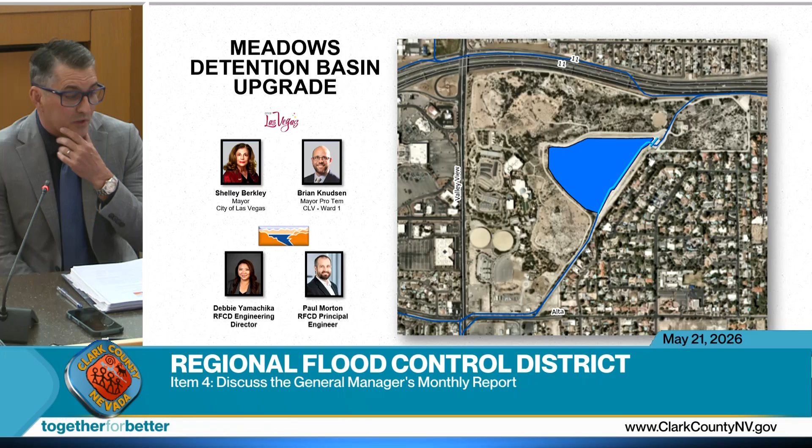And I'd also like to report on a project closeout that we had, and this is in the city of Las Vegas, Ward 1. It's at the Springs Preserve, actually. We have a detention basin at the Springs Preserve. Some analysis and computer modeling showed that detention basin was actually undersized, so we had to have a project to expand that basin. One of the first ideas was to just dig out the entire basin, make it bigger and hold more water. Unfortunately, that wasn't a great solution because that is a cienega, which is basically a wetlands where the detention basin is. It's a habitat for the Springs Preserve. So we needed to come up with a more innovative solution.

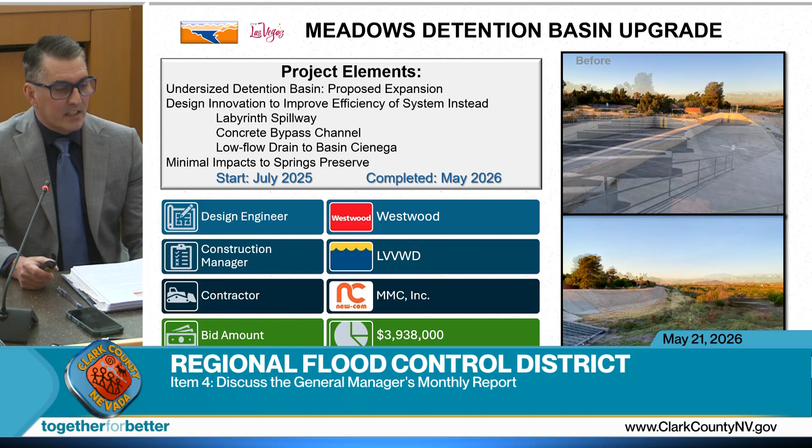So what we did, if you look at the picture on the right there, that's the before picture. We reconstructed the spillway and also added a channel that would flow through the basin so that more water would leave the basin as the storms come. Looking at the picture, you can see how it transitioned. That's what we call a labyrinth spillway, that spillway on the top. It's more efficient than the wall that you can see there. More water can go over the spillway at the same elevation, thus protecting the homes downstream.

Then the bottom picture, that's the channel I was mentioning that carries not the 100-year flow, but something less than that, so the lower flows will pass right through the basin without ever getting into it. Once the water gets above that channel, it'll spill out into the detention basin and hold that water there. To water the cienega in times of very low flows, there's a drain system that allows the water to drain into the cienega to water the wetlands and the habitat during dry times. So great project, very happy to get this one done. The design engineer was Westwood. The construction manager was actually the Las Vegas Valley Water District, who owns and operates the Springs Preserve.

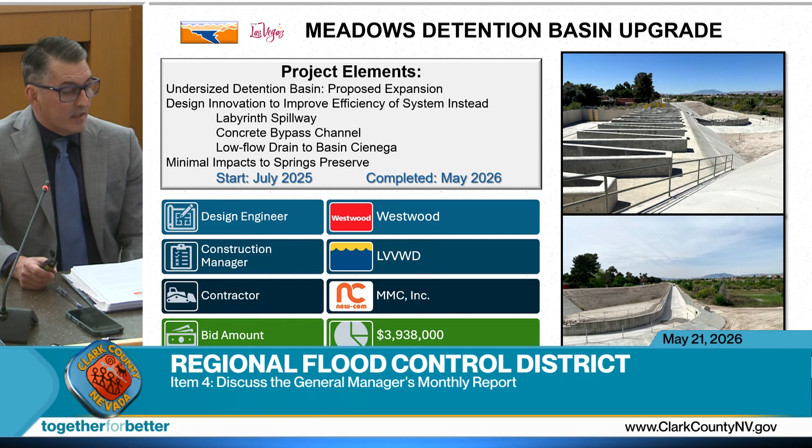Contractor was MMC, New-Com Company, and the bid amount was just under $4 million. Happy to get this project completed. And that concludes my general manager's monthly report. Happy to answer any questions. Thank you, Mr. Trelease. Any comments or questions from the board?

Mr. Vice Chair. Just want to say, now I know what a cienega is. Yes, I didn't know what that was either, so thank you. Thank you for educating us today. You're welcome. Very good. Move on to the next item.

Okay, we'll move on to part 2, the consent agenda. Items 5 through 13 are considered by the Regional Flood Control District to be routine and may be acted upon in one motion if the board so desires. I'll entertain a motion. Motion to approve the consent agenda. All those in favor? Aye. Aye. Any opposed? Motion carries.

Item number 14 is the Flamingo Wash University Center Drive to Palos Verdes Street project. Item A is action to accept the project presentation. We have a presentation presented by WSP for this. Matt Freeman is here.

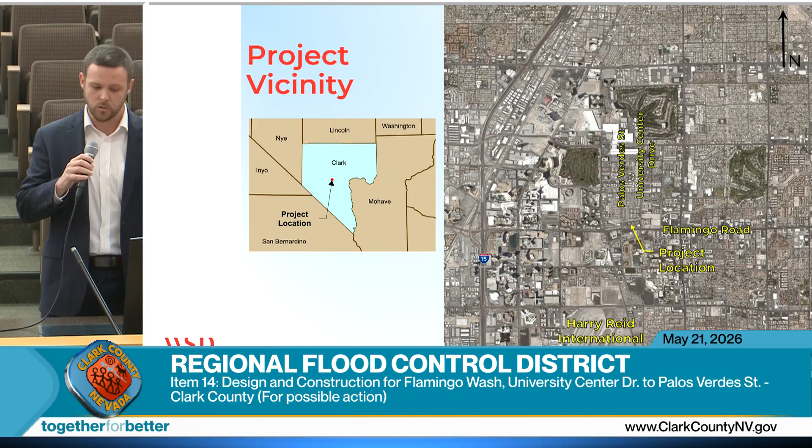Hello. All right. Good morning, everyone. My name is Matthew Freeman. I'm an engineer for WSP. Appreciate you taking the time to listen to our presentation on Phase 2 of the Flamingo Wash improvements. This project is located east of the Las Vegas Strip, just north of Flamingo Road, between Palos Verdes Street and University Center Drive.

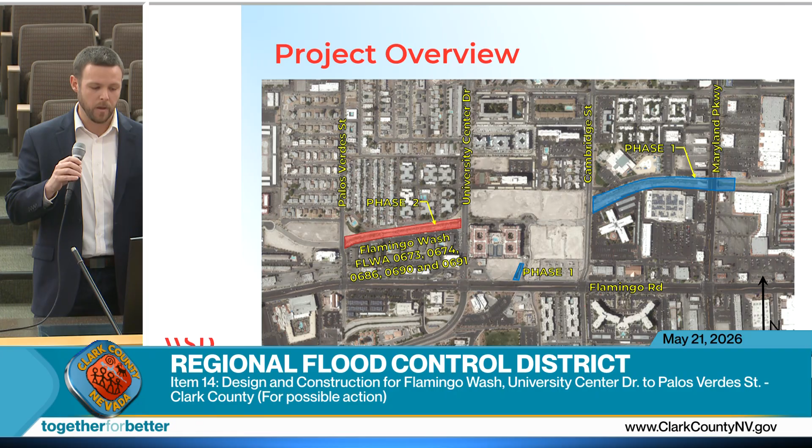On this slide, you can see Phase 1 of the project, which is currently under construction. Some of the improvements that were part of this project were the construction of a rectangular concrete lined channel. We also placed a lid on the open section of the Flamingo Wash, which you can see in that blue sliver towards the middle of the slide. And we also installed some of the expanded metal fence portions in the Phase 2 area.

So I'll walk you through some of the improvements here, starting from left to right. We plan on extending the five 12x8 culverts that are under Palos Verdes Street, which will then transition into three 20x8 culverts before transitioning down to three 8x16 culverts. From there, it'll flow into an open channel section, which will transition down to approximately 650 linear feet of a 30-foot wide rectangular concrete channel before transitioning back into three 10x7 culvert extensions that will flow under University Center Drive.

Other improvements as part of this project are a paved recreation trail along the north side of the channel, which will be funded by RTC. We will also provide colored concrete walls on the concrete lined channel, a 2-foot form liner, and expanded metal fence, which should improve safety and not let access into the wash.

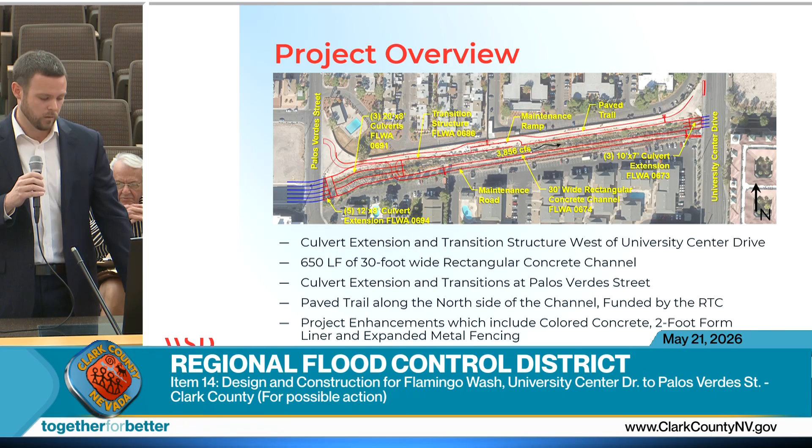Here I have two typical sections. First is the typical channel section. The left represents the south side of the project, and the right represents the north side. We have the existing expanded metal fence that was installed as part of Phase 1, then some gravel mulch slope protection. Next, we have a gravel maintenance road, and then the rectangular concrete lined channel. On the left side, or south side, we have a 2-cable fence, and on the right wall, we have an expanded metal fence. Then we have our paved recreation trail, some more gravel mulch slope protection, and the existing block wall.

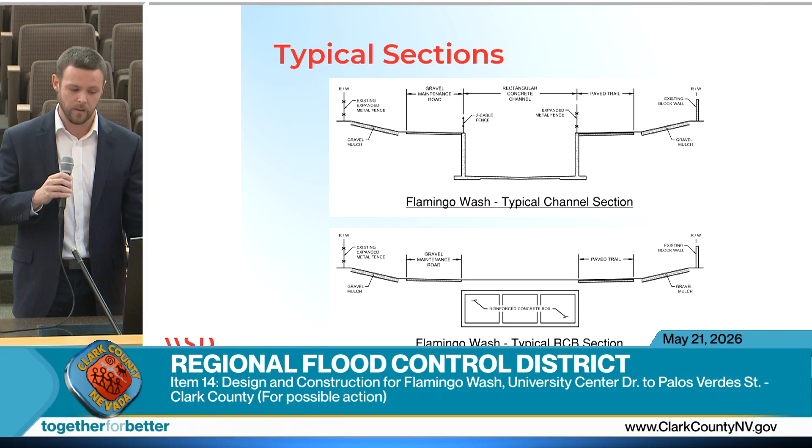Below is the reinforced concrete box culvert section. Similarly, on the left side, we have the existing expanded metal fence, some gravel mulch slope protection, a gravel maintenance road, our reinforced concrete box culverts, the paved trail, more of the gravel mulch slope protection, and the existing block wall. The project was designed in coordination with Clark County Public Works, the Clark County Regional Flood Control District, and the Regional Transportation Commission, as well as some of our local utility agencies.

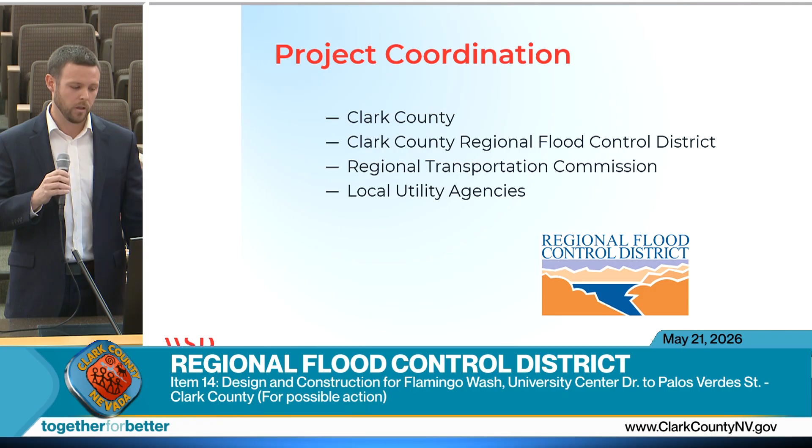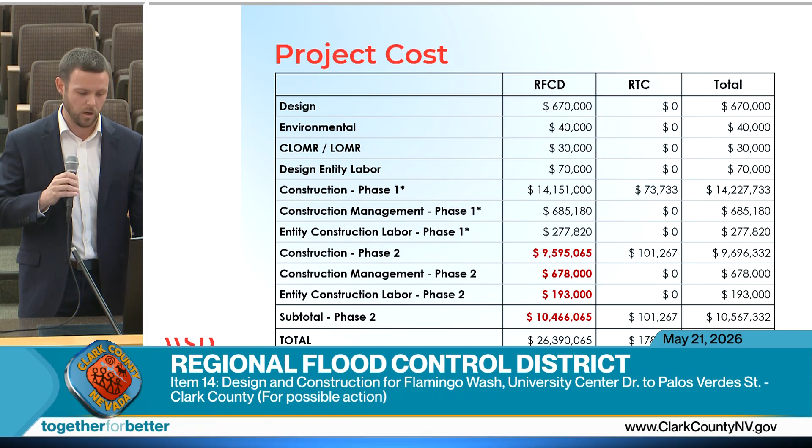Next, we have the project cost. As you can see, Phase 1 is listed on this table right here. As part of Phase 2, RTC will be providing approximately $101,000 for the construction of the paved recreational trail. And we are asking for funding for $10.5 million to construct the rest of the project. Funding eligibility requirements: design documents are 100% complete. Environmental requirements have been satisfied. Required permits have been acquired, and all rights of entry have been obtained.

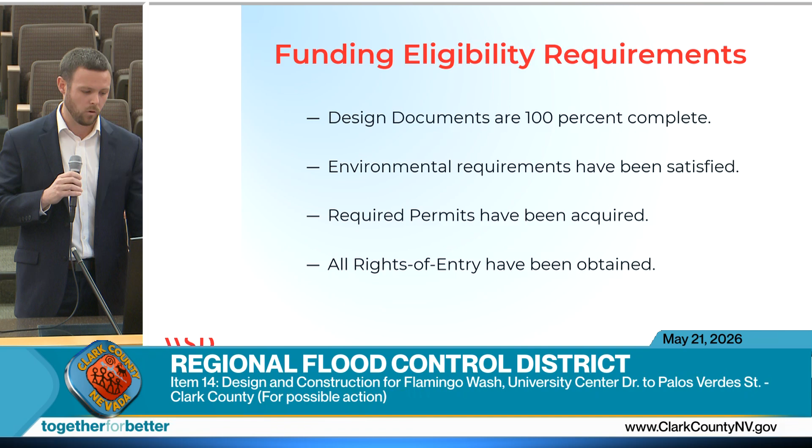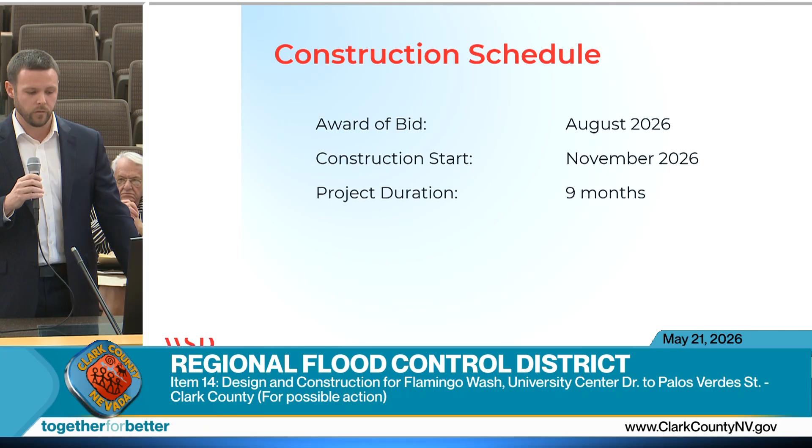Our proposed construction schedule is to award the bid in August 2026, start construction in November 2026 with a construction duration of 9 months. With that, I'd like to open up to any questions. Thank you. Comments or questions to the board?

I had one quick question. In terms of the recreational trail, I know we've talked on this board in the past. At what point in the design process did that come up, and how was it raised? I know Commissioner Segerblom and I have both talked about this issue before. How did it first come about that was discussed as a possibility? I don't know if that was before you got involved or.

Yeah, that trail has been kind of in the works for a long time, just because it was a good connection to the campus there at UNLV. So there's been several different options that have been floated around for that area. And so when this project came up as a possibility, there wasn't any room to do that until this project came in. So once we did phase 1 and phase 2, they added that. So it's been in the plan for a long time. And then it was just a great opportunity for us, with this section of it, to add that trail to our project. Okay. Richard, did you have a comment?

State your name for the record. Sorry. Richard Robinson, Clark County Public Works Design Division. As part of development of the project, we review the master plan for trails, and we noted it, and we relayed that opportunity to management. Management then looked to get funding from RTC, and RTC funded it. Great. Is that a fair enough answer, sir? No, I just wanted to see kind of where in the process it comes in. Yeah. So in scoping. Great. Thank you.

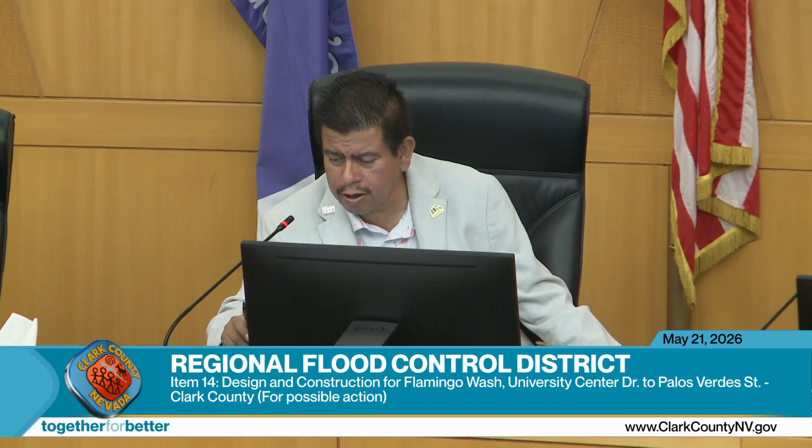Mr. Vice Chair? Yeah, thank you very much, Chairman. Yes, I had a quick question. Of course, this will be impacting the flow underneath Maryland Parkway. Is there any anticipated impact to the traffic for the overpass at Maryland Parkway? At Maryland Parkway? Yeah, there is some traffic control that is being done. That portion is currently under construction though, so phase 2 doesn't really include Maryland Parkway.

Okay, I'm just asking because I already do have people who are really looking forward to the end of construction there on Maryland Parkway. And I'm hoping that this project doesn't impact and lengthen the amount of construction on Maryland Parkway. I hope so too. Thank you. Fantastic, nice thing to hear.

Great. I will entertain a motion. With that, I'd like to make a motion to approve. There's a motion to accept the project presentation and approve the interlocal contract. Oh, sorry. Did you? No, sorry. Okay. My apologies. All in favor? Aye. Any opposed? Motion carries. Congratulations. Thank you. Okay, thank you very much.

Item number 15 is Centennial Parkway Channel West, Farm Road, Tee Pee to Hualapai, City of Las Vegas. Item A is action to accept the project presentation. Item B is action to approve and authorize the chair to sign an interlocal contract for construction. We have a presentation prepared. Andrew Howard from Westwood is here to provide that presentation. Good morning, Andrew Howard with Westwood. I'm the project manager for Westwood on this project, and we are presenting on the Centennial Parkway Channel West, Farm Road,

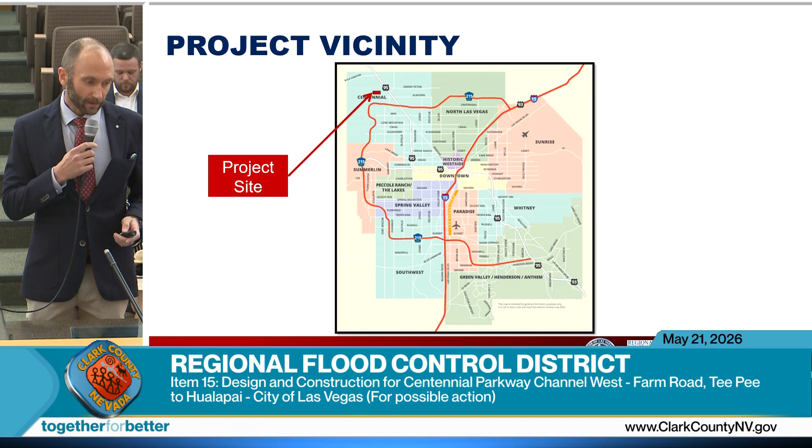Tee Pee to Hualapai. The project is located in the northwest part of the valley, Centennial, right on the edge of Hualapai. It runs from just west of Hualapai to just east of Tee Pee Lane, with a small segment of storm drain installed at Fort Apache due to a previous utility conflict at that location. I was thinking of Providence, that's the word I was trying to think of, on the edge of Providence in

the northwest. We are connecting an existing facility from the west that currently discharges through a large overflow bubbler structure just west of Hualapai Way into the street. And so we are connecting that facility, which will no longer purge water out into the street, and then connecting it to an existing facility down at the Tee Pee intersection.

And we are installing 6x4 RCB at the connection with the existing RCB upstream. That will transition to a 6x5 RCB for most of the stretch of the segment of the storm drain. And then at the downstream end, it's going to transition to a 7x6 RCB where it connects to the existing system at Tee Pee. And then as well, 7x6 RCB at the Fort Apache crossing where there was an existing utility conflict with the previous project.

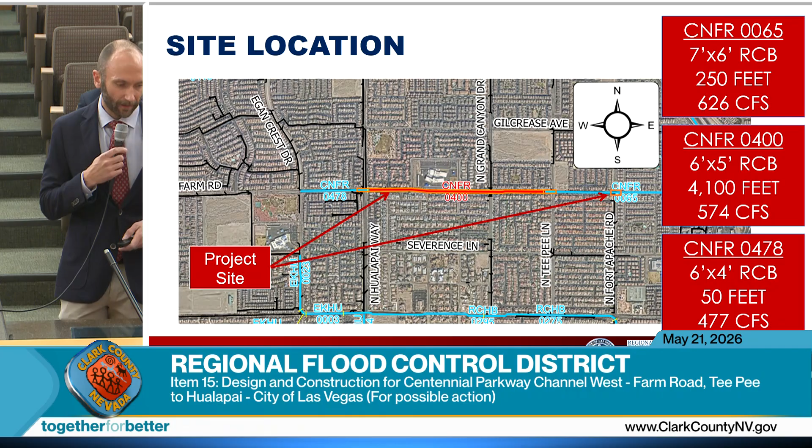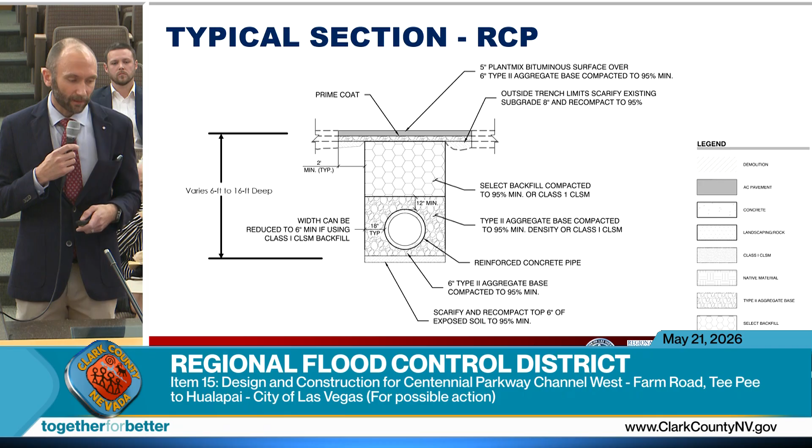Typical cross-section for RCB and RCP: we have trenches that are varying from 10 feet deep to 22 feet deep. The deepest parts of the trench are due to avoiding utility conflicts at the intersection of Hualapai. Ditto for the RCP, 6 feet to 16 feet deep, and that is as well due to the depth of the RCB, some of the deeper parts due to those avoidance of conflicts.

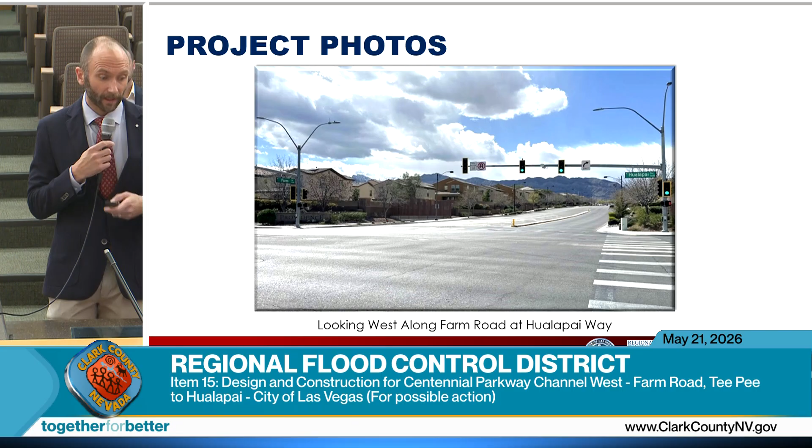Here's a photo looking west. This is at the edge of Providence there, and this is that bubbler structure. You can see it off to the left, that wrought iron cage and the landscape easement on the south side of Hualapai. That will be removed, and we will be returning that landscaping back to just rock so that the HOA can have landscaping in that area without the overflow spilling over the sidewalk. So great improvement to this intersection.

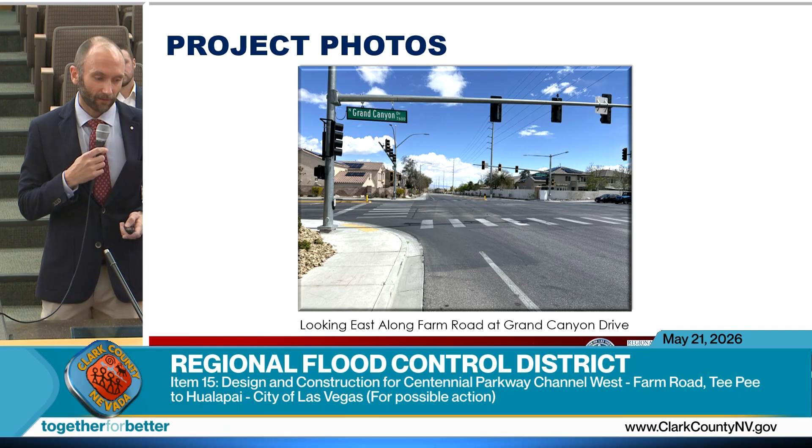This is at Grand Canyon where the storm drain will actually be converging with an existing parallel storm drain that's in the road there. And we'll be transitioning, bless you, to the south side of the road. And this is at Tee Pee looking east, and this is where the existing storm drain downstream will be connected to the proposed storm drain and extending west.

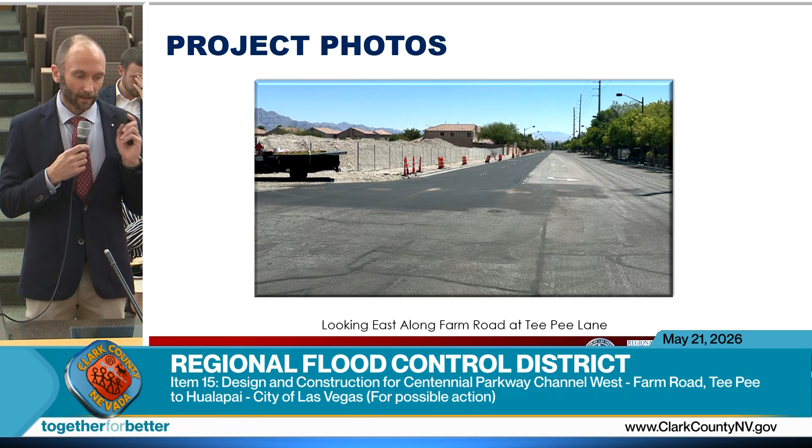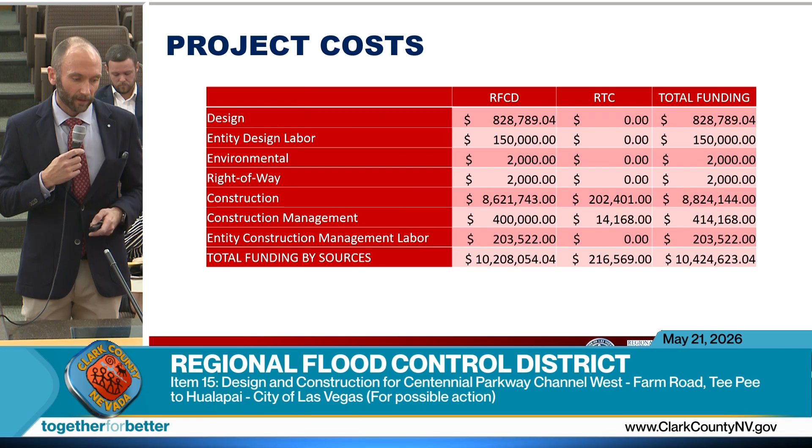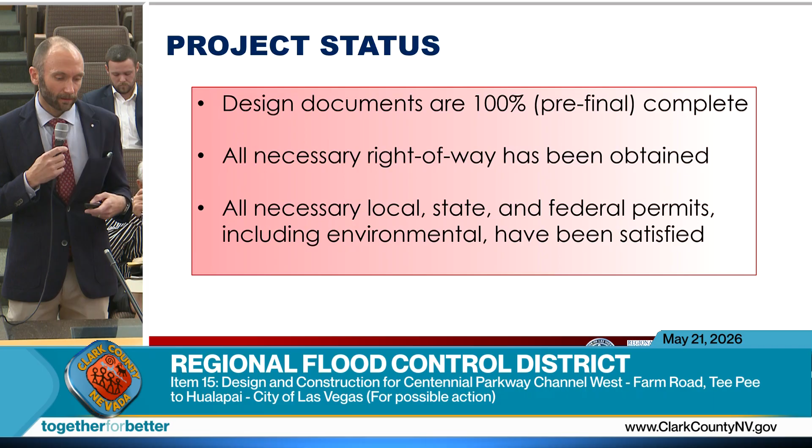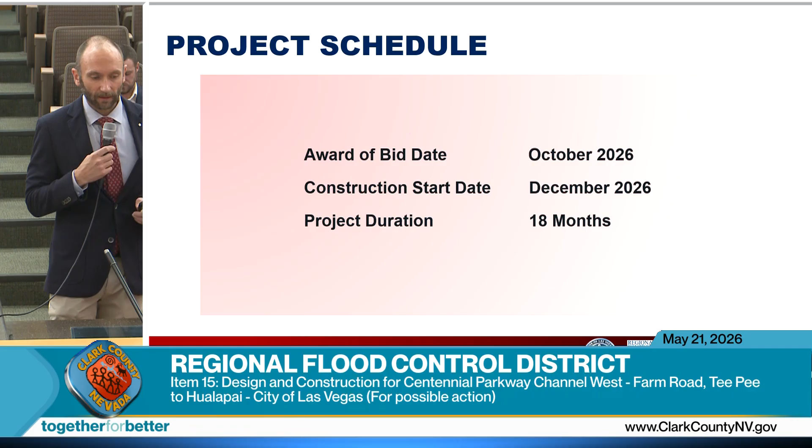Design documents are 100% pre-final. We are actually submitting those this week. All necessary rights-of-way have been obtained. Everything is within the right-of-way except for that bubbler structure removal, and we do have the notice to entry for that. And then all necessary permits have been obtained. We are anticipating a bid date in October of '26, construction in December, and duration 18 months. Any questions?

Thank you, Mr. Howard. Any comments or questions? Very good. Thank you. I'll entertain a motion. There is a motion to accept the project presentation and approve to authorize the chair to sign the interlocal. All those in favor? Aye. Any opposed? Motion carries.

Next item, Mr. Trelease. Item number 16 is comments by the general public. This is the second time set aside for public comment. Anyone wishing to provide public comment with regards to any matters before the Regional Flood Control District, please step forward to the microphone, state your name, and please limit your comments to 3 minutes.

Bernard Mullamed, 3111 Bel Air Drive, Unit 20A, 89109. Listening to all these presentations about flood control and channels and the rest, I hear nothing about the unhoused. And it's been my observation that the unhoused tend to congregate in basically these projects. I'm concerned about safety, I'm concerned about access, I'm concerned whether the engineers have considered this at all. Thank you.

Thank you. We can't respond directly during public comment, but I'm sure that Mr. Trelease or someone from his team is happy to talk to you about our efforts in that regard after the meeting. Next speaker, please.

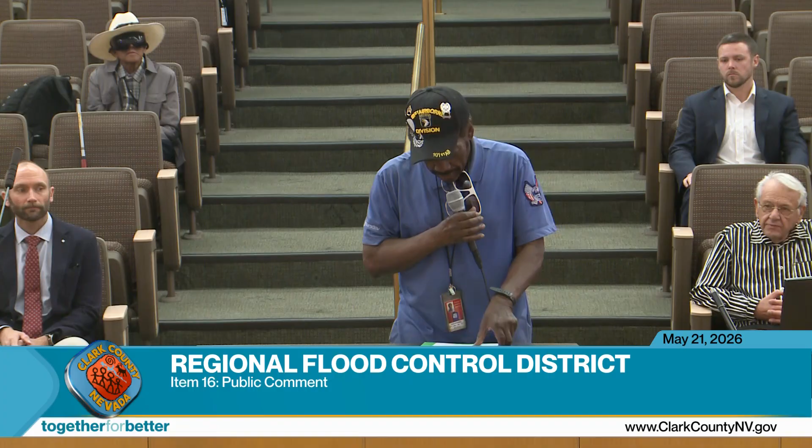Stanton Holiday, I'm a driver. This is the RTC meeting, it will be up next, so if you want to sit down. So this is the wrong meeting? Yeah, but give us 5-10 minutes and then we'll start the RTC meeting. Okay, I'll come back. Very good. And then y'all will let me know when to come back. Yep. Okay, thank you. Very good.

Anyone wishing to address the Regional Flood Control District? Seeing none, I'll go ahead and close the second public comment period, and we are adjourned. Thank you very much. We'll get started with RTC in just about 5 minutes.